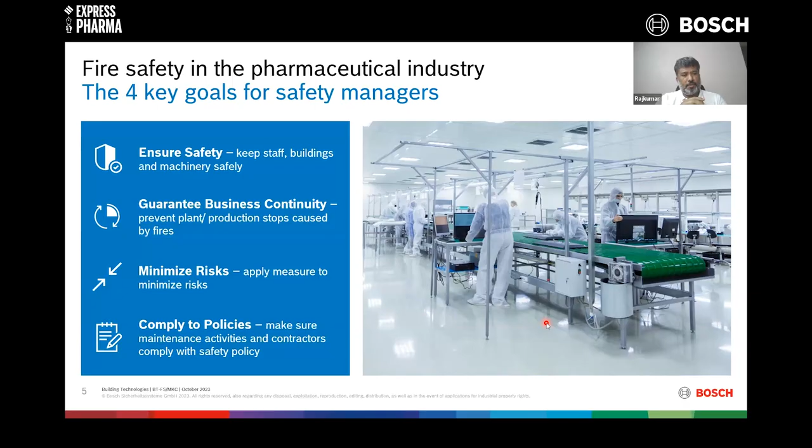This is something that we promise; we talk about business continuity whenever we talk about our fire alarm systems. Minimize risk, and of course comply with a lot of policies. When I say policies, the fire alarm industry is governed by a lot of standards: product standards, installation standards, and of course the building code in the country as well. So you have to comply with all these policies, and with our fire alarm system, we tick all four boxes here. We make sure that we live up to your expectation on these four aspects, and we try to help you achieve all these four key goals.

But there are a lot of fire accidents that don't make it to the national media. They probably stay within the local media. The meaning is, we have almost a fire accident every day. It is important to have not just the fire alarm system, but also a good fire protection system in total. Detection, protection, and also suppression are important aspects.

But thanks to the awareness that we have spread in this industry, in this country, I think after roughly 2010 and 2011, things have really got better. The industry has become much more professional. Customers have been installing really good fire alarm systems, fire suppression systems, fire protection systems, and frequent audits, the associations' help, and the experts in fire are making it really nice. Things are getting better. In the coming days, we shouldn't see any such fire accidents in the media, and no such fire accident should happen in any of our plants. That's something I would wish for this industry and this country.

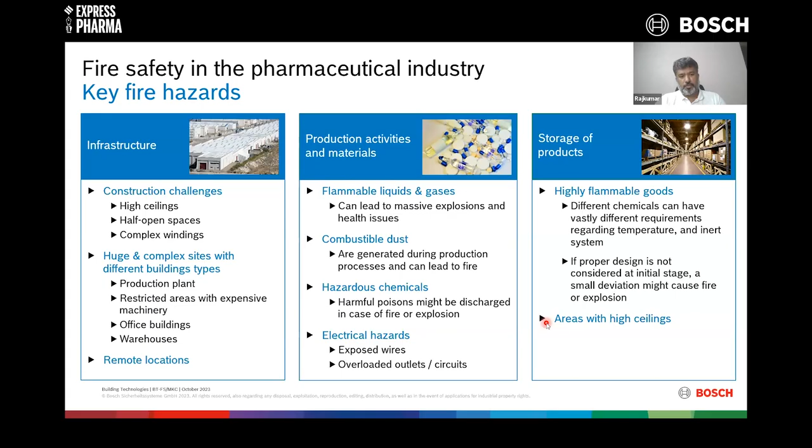Lakshmi, if I can call you here. I'm going to show roughly about 12 or 14 different use cases here, and these use cases are nothing but challenges, and with challenges, I'm going to talk about solutions. So before I get into that, if we can just quickly talk about those two poll questions.

Yes, can we have the poll on the screens, please? Now we have a second poll on all of your screens. Please take a look at it and do participate in it. I'll read out the poll for all of you. Which are the two most challenging applications in your plant regarding the detection? The options are as follows: admin areas, formulation facilities, clean rooms, warehouses and storage rooms, semi-open areas, specialized production processes, for example, gas detection. Please make your choice. The poll will stay on your screens for about 30 seconds.

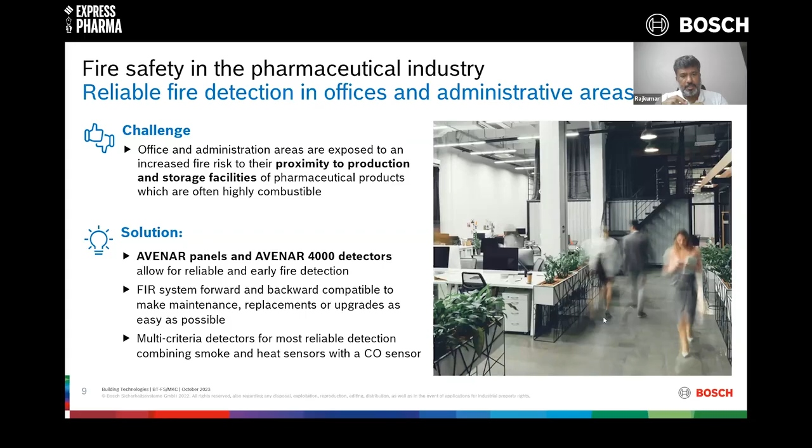And the next challenge: the formulation process in your plants, in which different chemical substances are combined to produce a final pharmaceutical product, has high fire and explosion hazards due to combustible dust and flammable liquids. Now what do you do then? The key word here is combustible dust. Dust is something that you probably cannot live without in a pharmaceutical plant. And when I say dust, it is of course chemical dust I'm talking about. In a steel plant, for example, it's real dust.

Now, the reason I brought up the steel plant and the pharmaceutical plant is because of the dust. It is very tough to have a fire alarm system which is maintained really well on a day-to-day basis. I'm sure many would accept the fact that the fire alarm system, the smoke detectors or the multi-sensors, after it is installed, also needs a lot of maintenance. To work well on site without any false alarms, you'll have to clean them often and keep them up to date.

Now how do you do it? As part of the maintenance process, you probably do cleaning once in 15 days or once a month, and therefore you upkeep the system. But here we want to be slightly different. The difference is here.

Normally what happens, when you remove the detector from the ceiling, you would probably spray it with compressed air and call it cleaning. When I say you, the system integrators or the industry experts would always blow compressed air from outside and say it's cleaned. But in our opinion, it is not done really well. So what do we do?

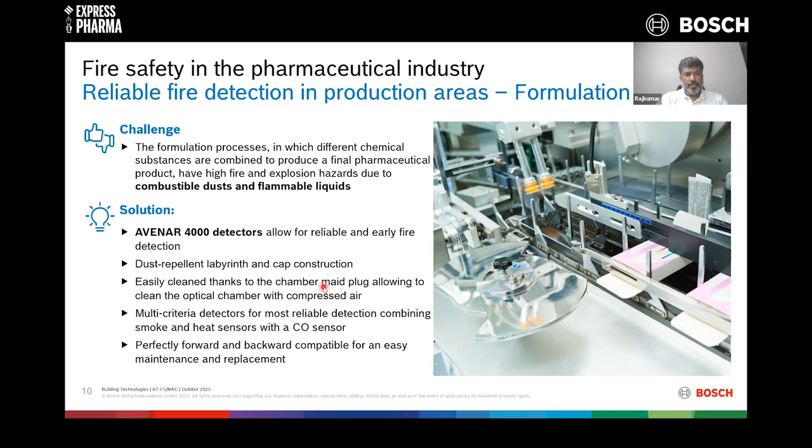Coming to the third challenge, I'm sure not many would have heard of this, but you would have experienced it for sure. You would not have realized that it is because of this. Many pharmaceutical plants struggle with a high number of false alarms due to electromagnetic disturbance values, leading to trouble in operations and bad plant performance. Trust me, not many industry experts know this either. I'll just give you an example.

On a weekend, let's say a Saturday or Sunday, the system integrator or service provider cleans all the smoke detectors installed in the premises. They put them back in place, make a maintenance report, get it signed, and exit the premises. On Monday, when you resume production, all of a sudden there is a false alarm from one of the detectors. And you'll be puzzled: we just cleaned the detectors one day before, how is there a false alarm now?

False alarms need not necessarily be from dirt and dust. They can also be from electromagnetic interference. Electromagnetic interference is not seen, but it is experienced by the detector. If I have to call one device very poor in your ceiling, it is the smoke detector. The reason: this is the only device that works on 24 volts DC with a few microamperes.

All the other devices in your ceiling, from Wi-Fi routers to electrical cables, PA systems, lights, your machinery, everything works at AC 230 volts or three-phase 440 volts. This is the only device that works at 24 volts DC, which means it is subjected to a lot of electromagnetic interference from other machinery in your plant. And therefore, if not today, two, three or four years down the line, this detector will start giving you false alarms because of electromagnetic interference. You have not seen it for yourself, but it is definitely there, and it's affecting our detectors.

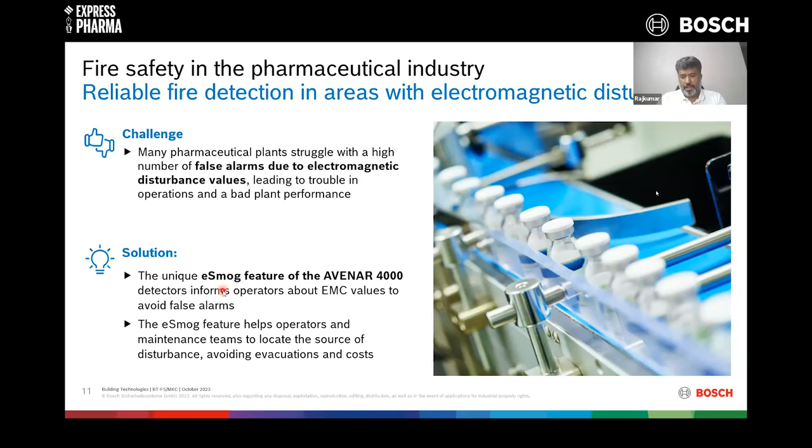Looking at the time, I'm just quickly wanting to run through the slides. Machinery and equipment in quality control labs and R&D areas are typically of very high value and therefore need reliable protection, but the rules regarding dust and dirt are very strict in these areas. This picture on the right looks like a clean room. Now, in a clean room, when you install a regular smoke detector, it needs a lot of maintenance, as I said in the earlier slides.

Now, when it comes to regular smoke detectors, if this has to be cleaned, let's say your lab is getting fumigated, or you may have to let me inside to clean the detectors, and I'm sure you're not happy letting me in to clean the detectors. Now, how do we do it? Bosch has an option called invisible detectors, which I'm going to show you later. They are ultra flush mount detectors, just like a light or a speaker in your ceiling. It is flush mount. How does it work?

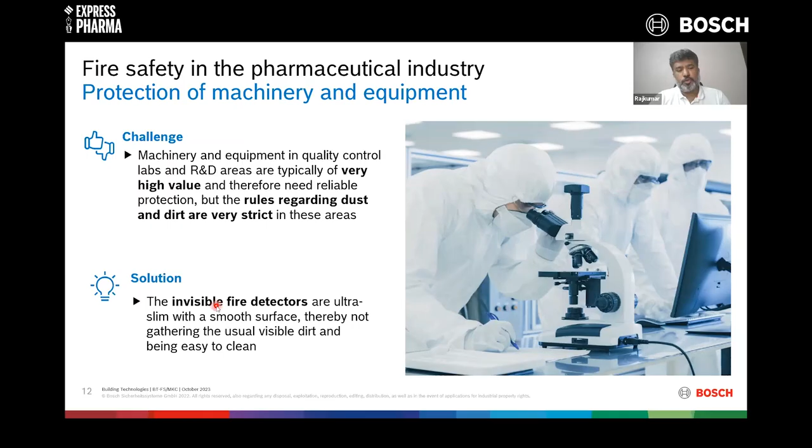Now we are again talking about clean rooms. In clean rooms, invisible fire detectors can be a great option. Look at the lights here, and look at the detector here on the ceiling. I'm not sure how many can see this, but this detector is not preferred by customers today. The reason is this definitely needs cleaning in a clean room like this. If I have to clean this, I'm going to use compressed air and things like that, and that could affect the room itself.

So how does the invisible detector look? It would look like a light. It will be flush mounted, just like the light. And the most important thing is the surface of the invisible detector is dirt repellent and dust repellent, so dust doesn't settle on it. In case it is dirty, the cleaning would be so easy. All you would need is to wipe off the face of the detector, and that's the cleaning it would need. Nothing else. In case you're not okay with an invisible detector for whatever reason, can we be a bit smarter?

Yes. Bosch also has a product called AVIOTEC, which is video based fire detection. You install a camera in the corner of the room, and this camera detects smoke and also flame, and does it really fast, faster than any other traditional detectors. Meaning, a flame detection would happen in about 10 seconds, and a smoke detection in roughly about 16 to 20 seconds, based on the smoke, which is really fast compared to traditional detectors.

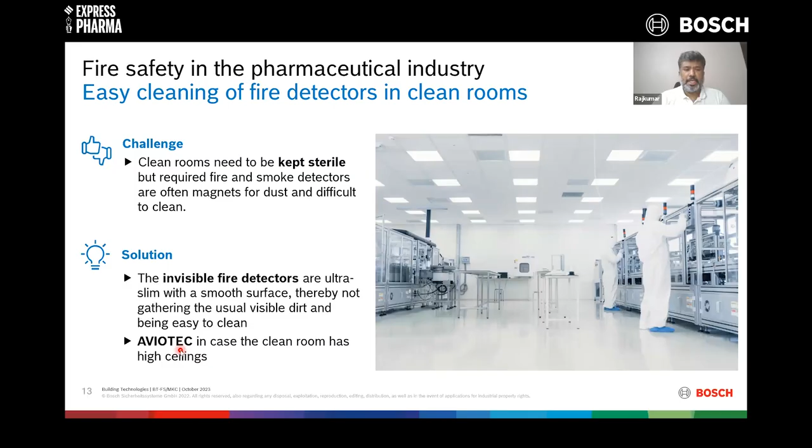And again, AVIOTEC is fit and forget. There's no maintenance for an AVIOTEC detector, except that you might need to clean the optics or the lens once in a few months or so. Otherwise, AVIOTEC is a fit and forget product. Likewise, the invisible detector is also fit and forget. You don't need maintenance for this as well.

The next challenge is your warehouses, either finished goods or raw materials. They typically have high ceilings. Now what do we do? How do we detect fire faster here? You've got the traditional options, which are the beam detectors. A beam detector has a transmitter on one side and a receiver on the other side.

A transmitter is transmitting an invisible beam to the receiver. In case of any fire, the smoke goes up to the ceiling and smoke cuts the beam, and the beam detector picks up an alarm. That's the traditional way of how it works. We do have it to offer, yes.

Now, the next best way is to offer an aspiration smoke detector. How does it work? It's a box installed in the corner of the room with a fan, with a highly powerful detector. And then you have a PVC tube that connects the detector to the room on the ceiling, and this pipe is drilled with smaller openings.

So what are we doing? We're trying to suck the air from the room and sample this within the detector. And in case of any smoke, the detector picks up an alarm really fast. This is nice. Aspiration is nice. Can we have something better?

And of course, again, introducing you AVIOTEC. AVIOTEC is Bosch's video-based fire detection camera. It's a normal video camera installed in the corner of the room to detect smoke and flame, especially for high ceiling applications. It does fire detection really, really quick. You'll see the picture of the product in the coming slides.

Now look at this picture, sort of a semi storage area, right? Can you think of a fire alarm system for this? Can you think of a fire detector for this? Not many traditional systems can be used here because there is so much wind. Smoke cannot stay there; it would be taken away by the wind. So detectors would not even detect smoke when you put them on the ceiling. Then what do we do?

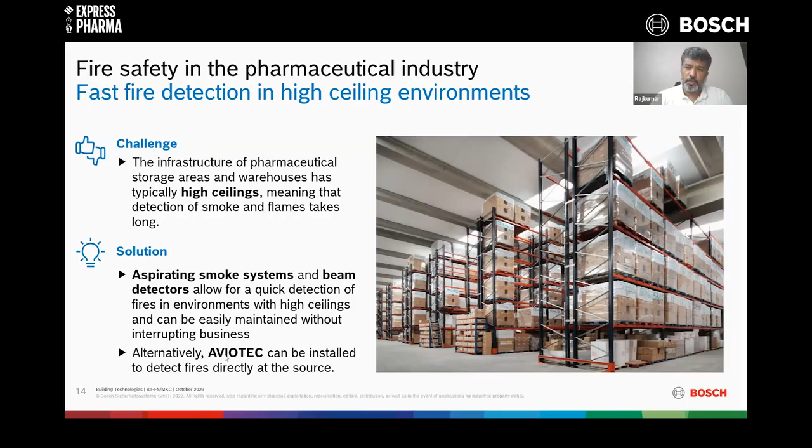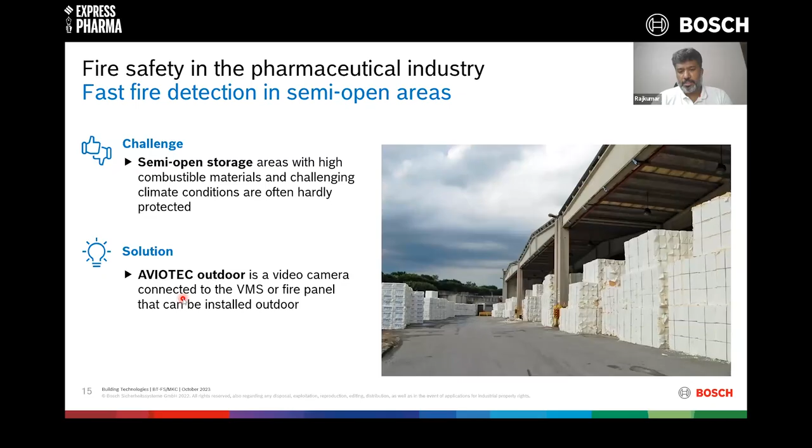AVIOTEC, the video-based fire detection system, can do the job for a semi-outdoor application. Put this camera on the ceiling or on the wall. It detects flame and smoke really quick. So AVIOTEC is both an indoor and outdoor device; it can be used for a semi-outdoor application for now.

Next challenge. Some areas, let's say your raw material warehouse, have a high risk of explosions due to the materials used and the processes performed. What does Bosch have to offer? We have the explosion-proof smoke heat multi-sensor, explosion-proof flame detectors and explosion-proof manual call points for areas which are classified, let's say zone 2. In all these areas you may go for an Ex-proof device, and Bosch has it as part of our portfolio.

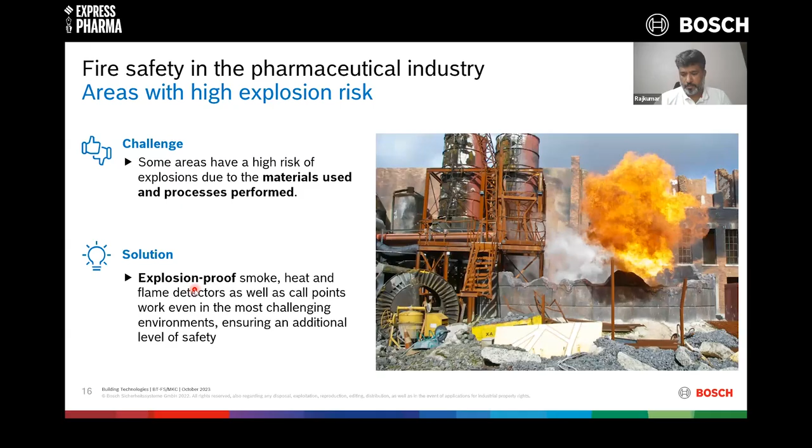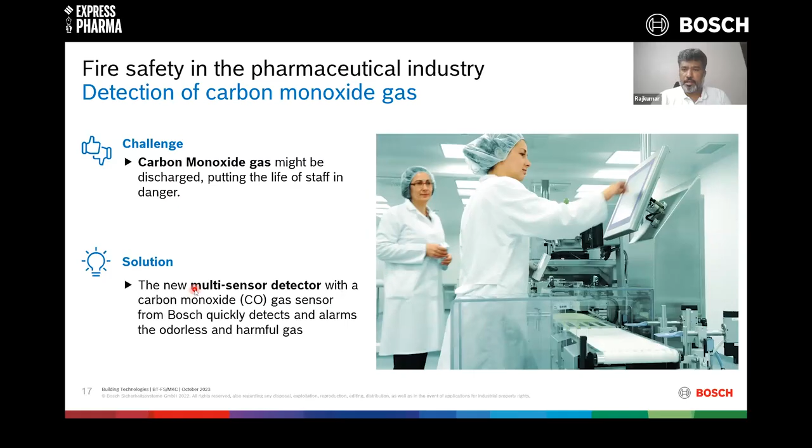Carbon monoxide gas might be discharged during the process, and then it puts the life of the staff in danger. Carbon monoxide is odorless and it is harmful. Can we detect it? Yes. Do you need a special detector? The answer is no. The Bosch multi-sensor we talked about, which is optical, thermal and chemical, has a CO sensor inbuilt, good enough to detect CO within the room. If there is a leakage of CO, this detector can pick it up and report an alarm.

So in a few areas within the pharmaceutical plant, you might need specific detectors that should not start an ignition due to hazardous gases or chemical dust. You need detectors which are intrinsically safe. This is something that we do not have to offer. Bosch doesn't have an intrinsically safe detector, but a lot of our channel partners source them from the market, and we have an option to integrate them to the Bosch fire alarm panel.

Say you need an intrinsically safe detector, but not an Ex-proof. Ex-proof is something Bosch has to offer. But if you only need intrinsically safe, we can source it from the market, and we have a special module called the CZIM, through which it integrates with the fire alarm panel seamlessly. So any of your labs needing intrinsically safe detectors can be connected to the same Bosch fire alarm system.

Another question. Now, this is something that we have experienced in India when we did a lot of pharmaceutical plants.

When you go to a new plant, for example, it is built. Let's say 4 to 5 buildings are built now, and they buy a fire alarm system which is very well installed and handed over. But 2 years down the line, they will go for an additional warehouse or an additional plant.

Now, after 2 years, when you buy another system from the market, there's less possibility of the new system getting integrated with the old system. The reason being, backward compatibility is something that not many players would talk about, but at Bosch we keep talking about this very often.

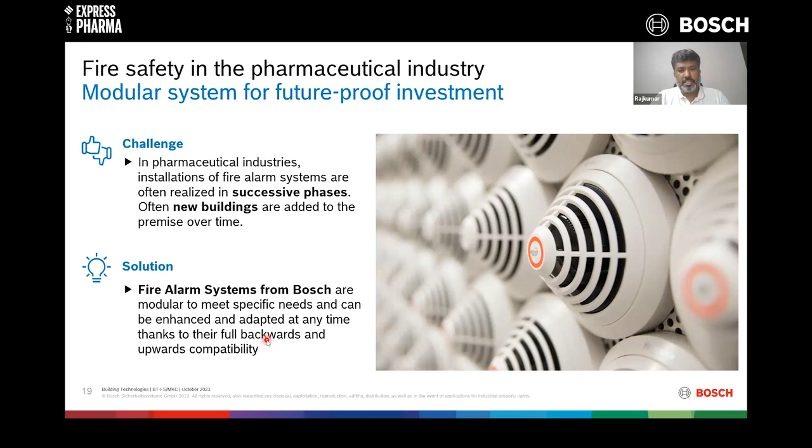Now, let's say a customer wants to buy a detector which would be launched in 2030, but still wants to connect that new detector to the panel that was supplied in 2023. Is that a possibility? The answer is yes as well. So at Bosch, whenever we launch a product, we make sure that it is backwards compatible and forward compatible as well. So please be rest assured that the system that you buy would be of use to you even after 10 or 15 years. I talked about an example of 2005 and 2023, close to 20 years already.

This question many have asked me, especially in the pharmaceutical industry. The plant is always in a remote area outside the city, while most of the channel partners, OEMs and industry players are present in the city. Now, if you have to ask them for support in terms of maintenance or troubleshooting, and it has to be really quick, many a times with plants like pharmaceutical it is not really quick. It takes some time, because someone has to come from the city to an area outside the city, or probably to a rural area, to address this.

Now, can we do it slightly differently in the case of Bosch? Yes, Bosch has something called remote services. A fire alarm system installed in your premises can be connected to the Bosch cloud. I'm in Bangalore; if I have to connect to your system and troubleshoot it, I can do it myself. If we agree to do a maintenance this Saturday, before I come I would log into Bosch remote services, go through the cloud, understand the problems in your system, and get prepared with whatever I have to carry from Bangalore. I come to your site, troubleshoot the entire system, put it back in place, and fill the entire report on an iPad, for example.

Whoever is connected to the fire alarm system, let's say the end user, the facility manager, the MD of the company, me as a system integrator, and the OEM if it has to get involved, all of us can get a report of what has happened on the site. And this is a living document. I've done a document today; if I come after 1 month or 3 months for regular maintenance, this document can always be referred. So I can remotely connect and troubleshoot a system if you have a problem without the need of me visiting the site.

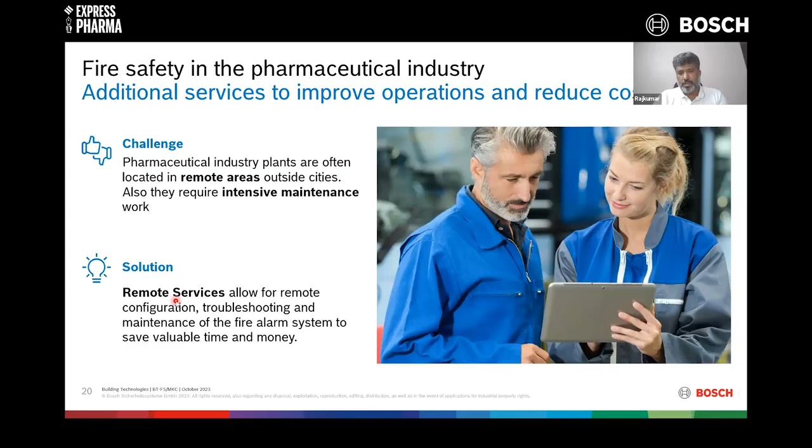And remote services is not something new. It was launched somewhere in 2019, if I'm not wrong, and we've done a lot of installations in India with remote services. So how can Bosch be different for your needs? We talked about this product called Avenar. Avenar is the fire alarm system that we sell across the globe. Bosch doesn't have a second portfolio to sell, which means what?

Rest assured that you're buying the best of products from us. And this product is completely modular. Modular meaning you have, let's say, a cafeteria where you need a one loop panel. Avenar 8000 can be customized as a one loop panel to be offered. Now you have a big plant which calls for, let's say, a 20 loop panel. Avenar 8000 with the 20 loop panel is a possibility. It's a modular system. So from smaller setups to bigger large factories, Bosch Avenar 8000 can be your solution.

And we talked about 100 years of experience. So I want to tell you this. We have a customer, for example, if I can quote their name here, Shobha Developers, which is a residential builder in the South. They've been buying our systems for 10 long years, and JSW Steel Plant, they've been buying our systems for 15 years now. So that's the kind of reliability that we give them in terms of how we handle false alarms.

And remote services, which is the futuristic solution. When I say additional remote services, it looks like remote services to you, but really we talk about smart buildings, about the Internet of Things, IoT. Remote services is an IoT thing: a fire alarm system connected to the cloud. Of course, you have not seen it in the demo, but whenever you're here, or whenever I'm there in your office, we can do this.

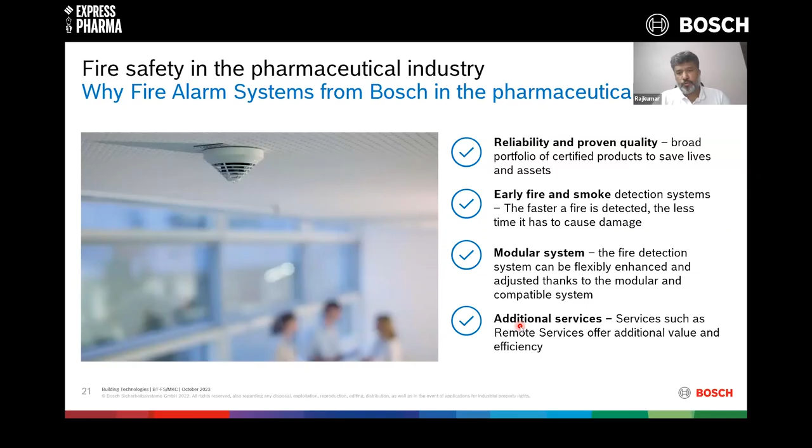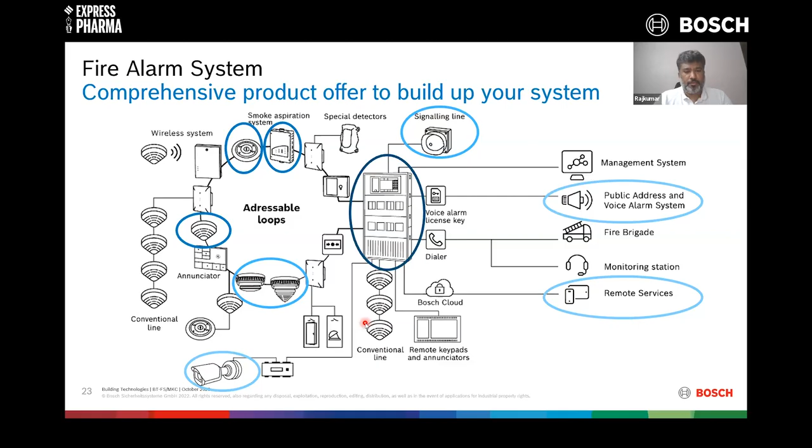Quickly talking about the panel, we call this Avenar. We have two products, Avenar 8000 and 2000. The 2000 is a one loop panel expandable up to 4. Avenar 8000 is a one loop panel expandable up to 32. To give you a summary, the industry average is roughly a 12 loop panel, and Bosch can already do 32 loops.

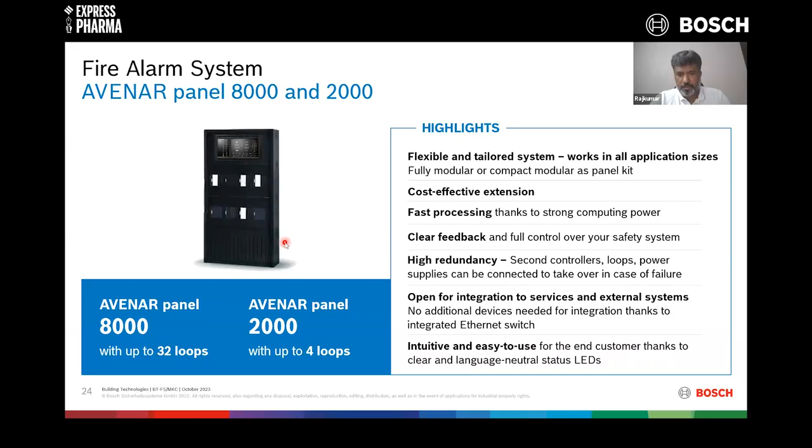Now you talk about redundancy. Say suppose this is a controller. In case this controller fails, what happens to the fire alarm system could be a question. Bosch can offer you controller redundancy. Can we offer loop redundancy? Yes. Can we offer power supply redundancy? Yes. Can we offer networking redundancy? The answer is yes. You demand and we have a solution to give you.

And then this is the detector that we talked about, the Avenar 4000 series detectors. This is how it looks. All the Bosch detectors would look like this. This detector has an inbuilt processor, and this processor has 5000 fire patterns. With 100 years of research, we understand different fires differently. Paper fire, plastic fire, chemical fire, oil fire are different.

Let's say, for example, agarbatti smoke, or steam coming out of the kitchen or as part of your process. They're very different, but they look like smoke. Can this detector handle all this? Yes. This detector has been trained with 5000 fire patterns to understand fire really fast, and also understands how to handle false alarms better at the same time. And this also has the e-smog feature for reading the interference in and around the detector.

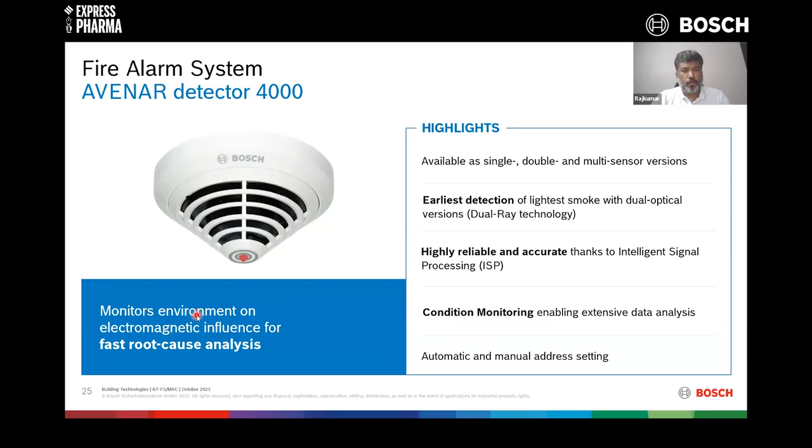The very popular invisible detector. Yeah, this is the regular detector which protrudes out of the ceiling, and this is the detector we're talking about, which is flush mount. Yeah, it's flush mount, and all that you need for cleaning is like this. The surface that you see here is a dirt repellent surface. Of course, it doesn't attract dust.

Yeah, in case it's dirty or dusty, there is a sensor here in the center of the detector which calls for maintenance, and if maintenance is called, then cleaning is just this. You'll have to take a piece of cloth, wipe it off, and that's the maintenance that would be required. Yeah. Now you also understand that we can give you detectors of different colors.

So this detector, as I rightly said, is for clean rooms in a pharmaceutical plant. But at the same time, let's say you have a nice looking room. Aesthetically, you want a detector that should look nice. You can buy this detector and ask for a color: blue, green, red, yellow, whatever color, or you have your own color scheme. Please give us.

We print some screens and we put it in the detector, and this detector gets camouflaged in the ceiling, and then you don't see it at all. Yeah, and that's why this gets the name invisible detectors.

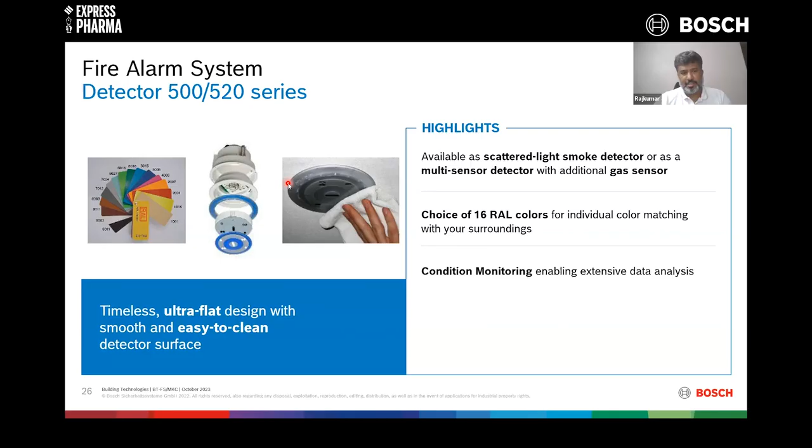Another nice product from us, recently launched, we call this Avenar all-in-one. What does it mean? A sounder, a flasher, and a detector, all three in one. Yeah. Now, what is the specialty of this? The specialty is, of course, all-in-one is again a new thing in the industry. But the reason it is so special is because it has a lithium-ion battery, which is good to work for 10 long years.

Let's say in case of an alarm, for the strobe or flasher to work, or for the sounder to work, it doesn't draw any power from the fire alarm panel. It takes power from the lithium-ion battery itself. Yeah, and therefore we call these loop-powered sounders, and you can also have up to 125 devices in a loop.

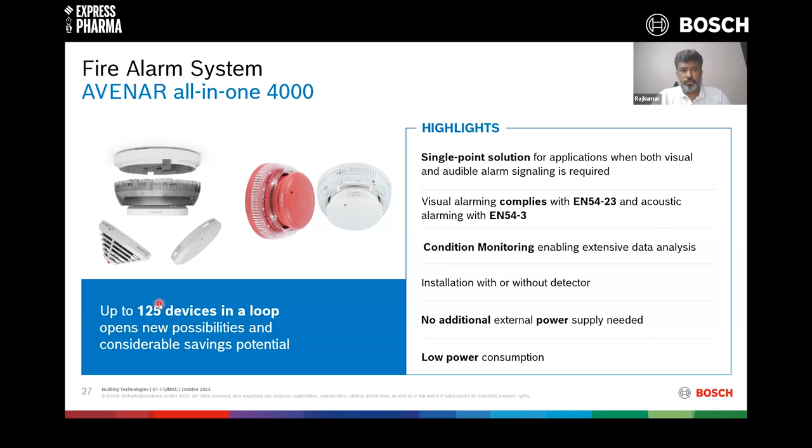It's a breakthrough. The reason is whenever you use a loop-powered device, the problem is you cannot have more than 10 in a loop because it takes a lot of power and it brings down the current in the loop, and therefore you cannot travel distance. Whereas with this kind of detector, that's the answer that you get. 125 devices in a loop is a possibility, which means you can cover a lot of smaller rooms in the factory to be installed with a detector, sounder, and flasher. Just go for it. Possible.

And then the aspiration system that we talked about in one of the examples of warehouses: we said there is a box installed with a fan within. A PVC tube connects to this aspiration box, and the PVC tube is drilled with openings. So this fan sucks the air. Now, what is special? Every other player in the industry has it, but what is special about this?

This is a direct addressable device, which means it is part of the loop, and the entire system is programmable from the fire alarm system only. So whatever happens in the aspiration system is seen in the fire alarm panel, which is not the case with many players in the industry. Yeah.

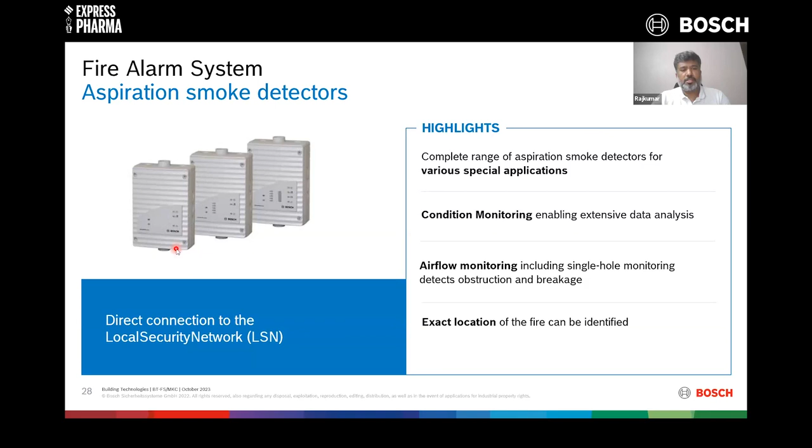Linear heat detectors. Suppose you have a cable gallery running from the production area to the control room. You have a cable tray or a trench, for example, and the cables have to be monitored. These linear heat detectors can do the job: this gets installed outside somewhere, and there is a linear heat sensing cable that is run along with the power cable or in the cable tray.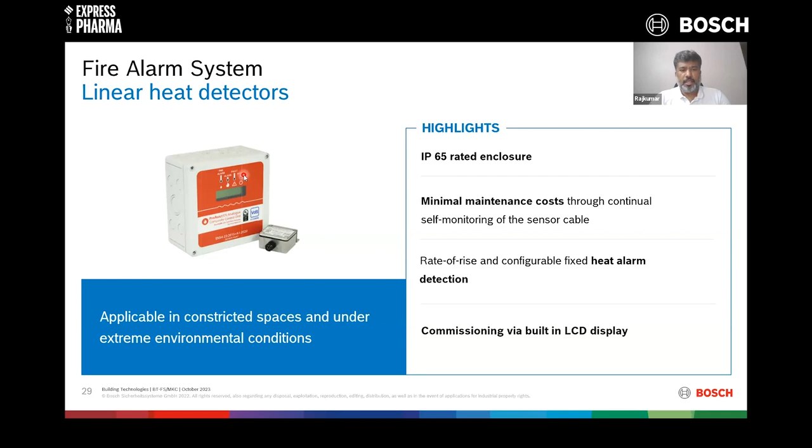In case some cable gets punctured and there's a short circuit, this can pick up the heat and report an alarm really fast. Yeah, that again we have an option.

And then beam sensors that we talked about for the warehouse: we have beam sensors of different kinds, and Bosch can give you options as well. 100 meters, one side a fixed detector, transmitter and receiver, and the other side a prism. Or you want a detector transmitter which is also motorized, where you want to control the entire thing from the bottom, from the floor, for example. That's possible as well. Yeah.

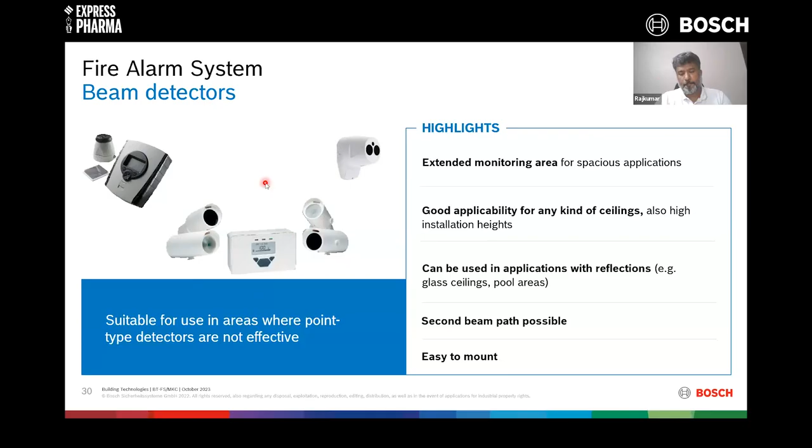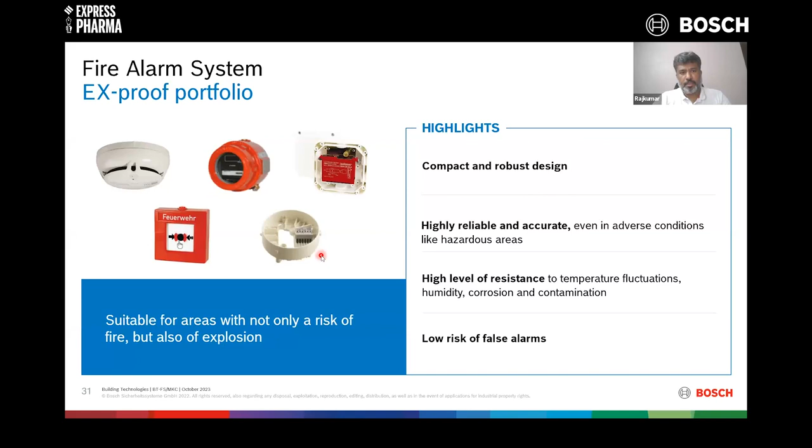EX-proof portfolio in your zone 2 areas. If you need an explosion-proof multi-sensor or a flame detector or a manual call point, again, Bosch has to offer. We do have solutions of that kind as well. Yes, the most interesting product, 2017-18 launch. The one that you see here in the picture is the second generation camera, which we officially launched last week.

This camera does the job of fire detection, both smoke and flame, and the time taken is so less. It is probably the fastest fire detector, smoke detector in the industry today, especially suited for high ceiling applications, maybe warehouses, production areas, production plants. You can go for it, and this detector can do a much better job than an aspiration system or a beam detector.

And the best thing, you know the real cause of fire because you have this installed. So if there's a fire that breaks out, probably you know why and where the fire started. Many a times you probably would deploy a team of people to understand how did the fire break out. But here in this case, when you have a camera installed, of course you have the video feed coming in, and it's getting recorded somewhere else in the CCTV system if required.

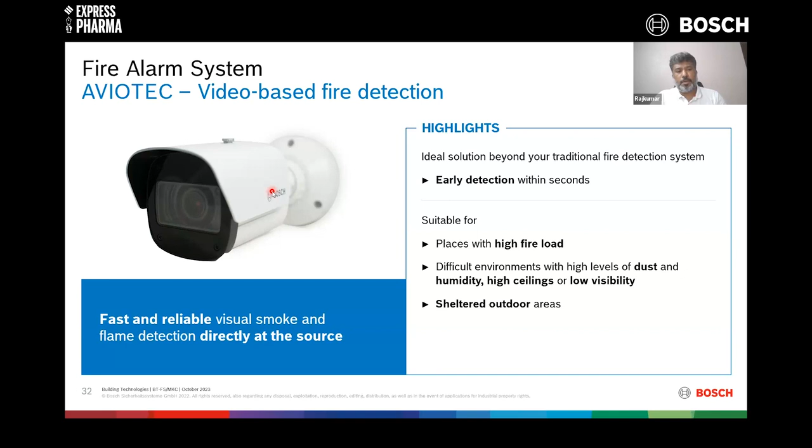Or you can put an SD card within the camera, it keeps recording the video within the camera itself, and this connects to any CCTV system, and this connects to the fire alarm panel at the same time as well, both indoor and also for sheltered outdoor applications.

Here we are talking about few references. When I say references in a public forum like this, we do not talk about all our projects. Wherever we received the customer's permission to display, we are only talking about such references here. Lupin Pharma is one of the installations in Gujarat that was recently done. I just want to read this for you, that is from the customer: Our new fire detection system relieves our stress levels as we no longer experience excessive false alarms at work. This is from the operations team of Lupin. This is robust, durable fire detection system, from the maintenance team of Lupin.